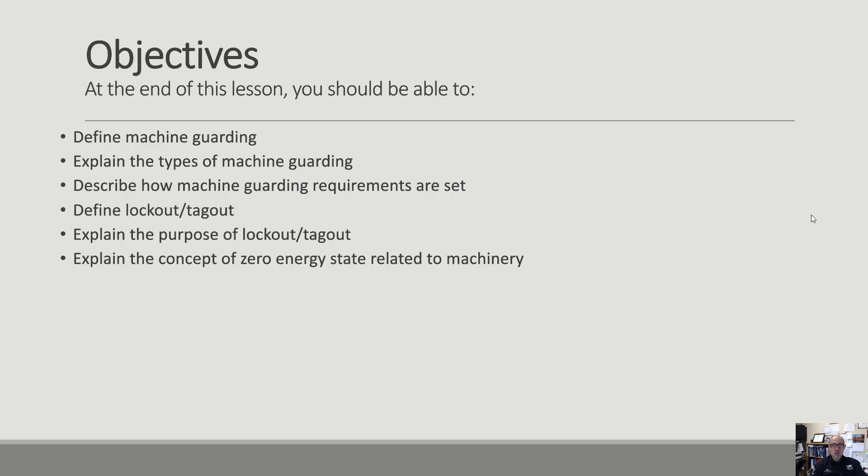Objectives: at the end of this lesson, you should be able to define what machine guarding is, explain the types of machine guarding that are out there, describe how machine guarding requirements are set, define lockout and tagout, explain the purpose of lockout and tagout, and explain the concept of zero energy state as related to the machine we were going to work around.

So, machine guarding. Many machines require special guards to keep the operator safe, and OSHA has many rules and regulations related to machine guarding. Pretty much anytime you've got moving parts, guards are probably going to be necessary. Some of the hazards that we try to mitigate with machine guarding are pinch points, crushing hazards, shearing hazards, rotational hazards, power transmission, so that can be drive shafts, drive belts, or chains, and then stored energy, compressed springs, or stored electricity, usually in the form of capacitors.

Generally, the distance the hazard is from the guard will determine the size of the opening. And this is set by the OSHA standard for machine guarding. It's part of the OSHA code. So the thought being, the farther away the danger is from the guard surface, the bigger the opening can be. Because if what's going to hurt you is a foot away from where the guard is, an opening just barely big enough to get your finger in, that's way excessive because you don't have a foot long finger, hopefully. So the farther something is away, the bigger the opening can be.

The closer that hazard is to you, the smaller the opening is, so you can't get much more than a finger into it. And here's OSHA's rule: if the guard is within 2 inches of a moving part, the guard opening must be a maximum of 3/8. So it's pretty small when you're working with stuff that's close to you. And there are tools available to check guard openings for different distances from the hazard. There's a picture of one on the next slide I'll show you.

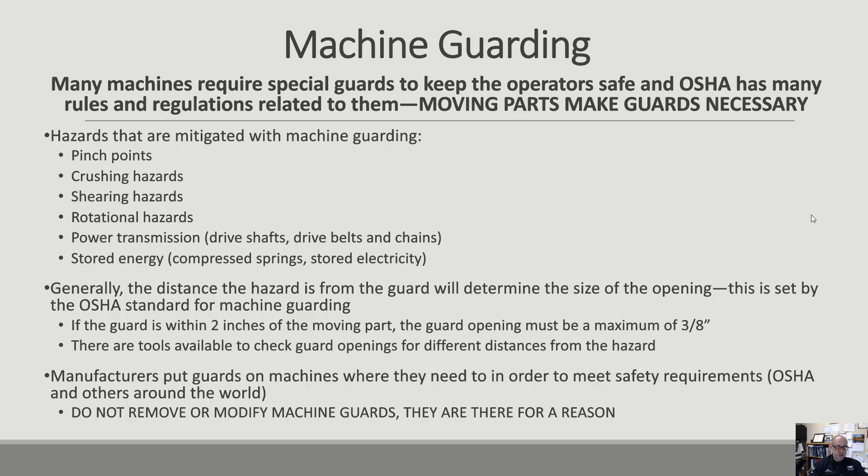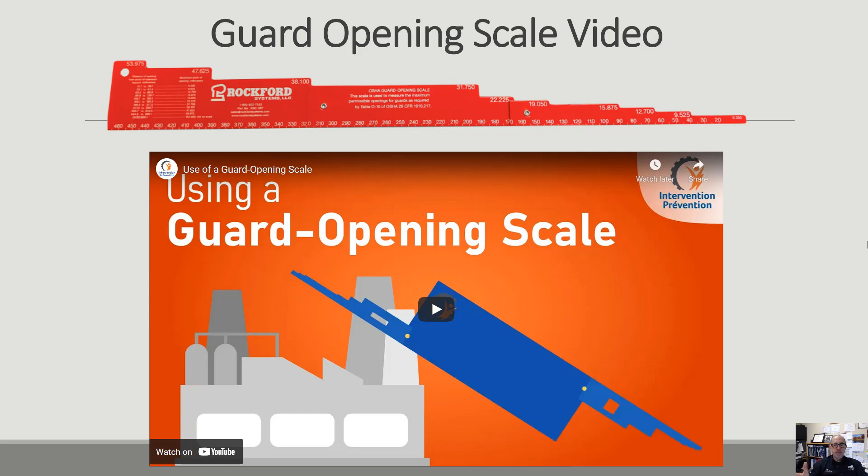And here's a guard opening scale. As you can see, the farther away you get from what the danger would be, the bigger the opening can be. And there's a short video you can watch.

So machine maintenance and service. One of the biggest hazards associated with machinery is maintenance, cleaning, and repair work. In most cases, guards have to be removed in order to access the machine or access lube points or adjustment points or to replace stuff that breaks. Many serious injuries and fatalities in the workplace happen during cleaning and maintenance operations.

Locally, there was a case where a woman was killed by being caught in a conveyor system. She was cleaning the machine while it was running. The guards were removed so they could clean it, and her hair got caught in the conveyor mechanism. It pulled her in the machine, and she was killed. And unfortunately, that's not a rare story. That is one of the most common causes of workplace fatalities when it comes to working with machinery: you get caught in it, and a lot of times those are going to be fatal injuries.

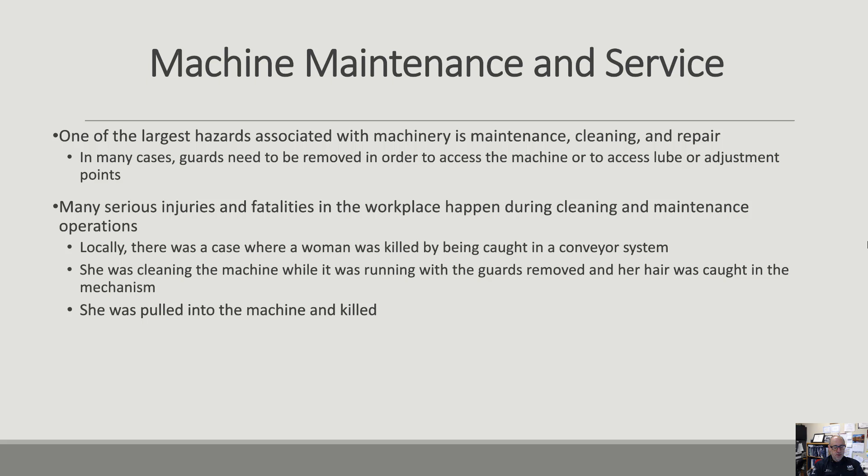There's another one, a pretty bad one. If you remind me, I'll tell you about it in class. It's pretty bad.

So, part two. In our own welding lab, we had an employee that lost a finger on our small plate shear. Our Chicago shear has actually taken a digit off of somebody, and it was during maintenance and repair work. The employee replaced the cutting blades on the shear and was setting the blade gap. You've got to set the space between the blades after you replace them, and you set that with feeler gauges.

To do this, the guards that keep your hands out of the shear have to be removed so you can get the feeler gauges in there to do your measurements. So how this works is, when the machine is idle, the blades are separate, so you can't see what the gap is between them. You have to manually run the machine down and then turn the machine off while the blades are overlapped so you can set the gap between them.

So the proper technique to do that is, everything should be locked out while you're working on the machine. When you're ready to cycle the machine, everybody working on it takes their locks off the lockout. You cycle the machine with everybody at a safe place and turn it off when you need to, and then you relock everything out, and then go get in there and do your adjustments.

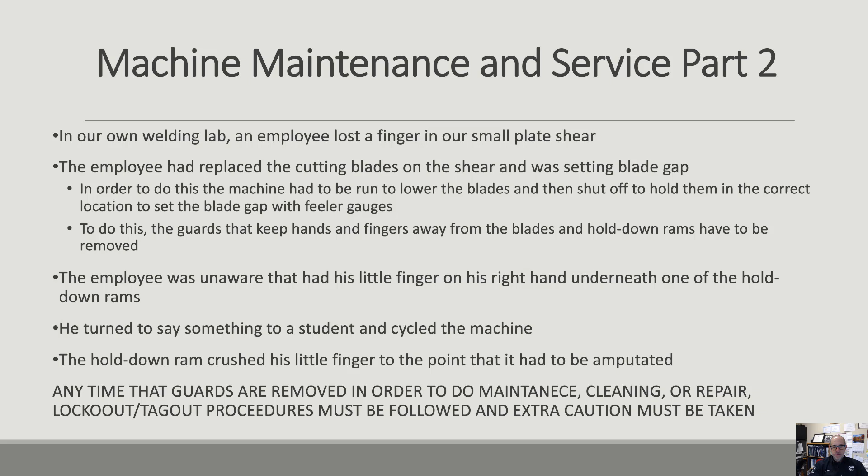So anytime guards are removed in order to do maintenance, cleaning, or repair, lockout tagout procedures must be followed and extra caution must be taken. It is truly what they call out-of-process work or out-of-sequence work, and that kind of work is inherently more dangerous because you don't have a set routine. You haven't done it 100 times before. It's something new. It's inherently more dangerous work.

Machine controls. Machine controls are another way that machines can be designed to be safer to operate. Many machine controls are designed to keep your hands out of danger while you operate the machine. Some machines require both hands to activate. This makes it hard to put your hands in the machine while it's running. A press, for example, might have two buttons on the controller that you have to push both for the machine to run. That's to make sure that you don't have one hand on the controller and one hand in the machine.

And some machines are made to be operated by two people. They have two sets of controls that are interlocked, meaning that it requires the operation of both controls to activate the machine. Again, this is to make sure that one person doesn't operate the machine while the other one is in the machine.

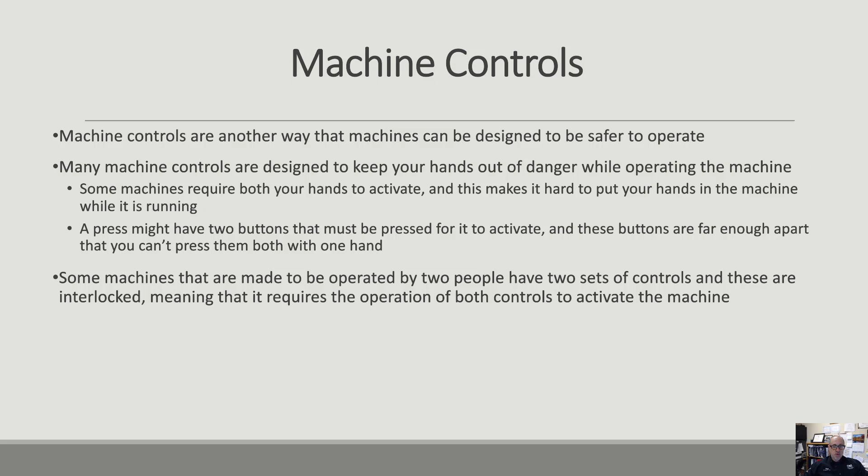So, lockout tagout. If you're in this industry for any length of time, you're going to get very familiar with lockout tagout. Understanding and adhering to its principles is absolutely critical to stay safe during machine and equipment maintenance and repair. So the two parts of that: lockout. Lockout, you bring the machine to a zero energy state, and we'll talk about zero energy state in just a minute. And you lock out the energy source on a piece of equipment so it can't be energized while it's being serviced.

How it works is people working on the equipment are issued individual locks and keys so that they lock out the piece of equipment. If there's 10 people working on a conveyor, which is what I used to do many years ago, there'd be 10 locks on the power box that operated that machine. And it couldn't be operated until everybody showed up and everybody took their locks off. Again, this is to make sure that nobody fires up the machinery while somebody is still working on it.

So tagout is used when you can't lock stuff out. A tag or a warning device is used to alert and warn others of a problem with machinery in unsafe condition. So tagout is inherently less safe than lockout since you have to be paying attention for them to work. You can ignore them or you can remove them, which is not ideal. Tags should identify a source of potential danger, and they indicate the equipment is being worked on and may not be operated until the tag is removed.

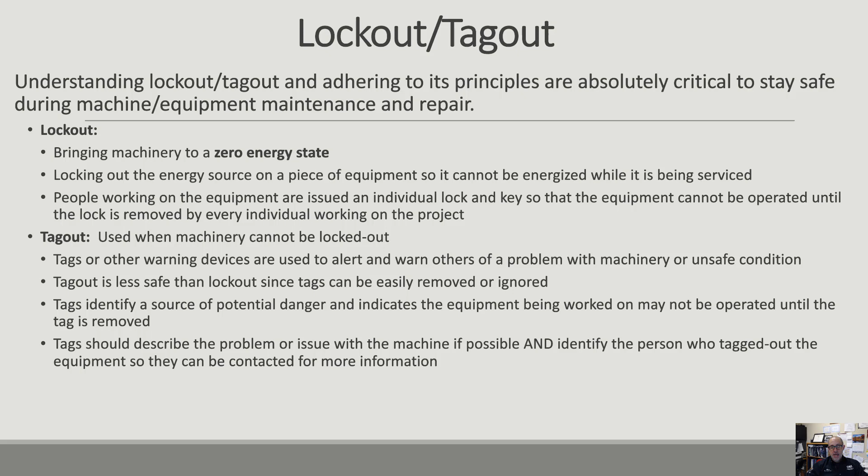It's not real helpful when you hang a red tag on something, either blank or with "doesn't work." That's not real helpful. The more information you can communicate, the easier it's going to be for the next person to figure out what's wrong with it.

So zero energy state. So what is zero energy state? It's broken up into two halves, electrical and mechanical. And what we want by zero energy state is to create a situation where there is no energy in the machine that can harm us or injure us while we're working on it. So on the mechanical side, it's going to be pressurized fluid. If there's pressurized air, that needs to be normalized. If there's external power sources, they need to be shut off and locked out.

Is that equipment supporting anything that, when we shut the equipment down, will move? And then mechanical potential energy, so compressed springs or suspended parts, and then kinetic energy, which would be machines that run drop hammers or forming dies.

And then on the electrical side, introduction of no energy. So we lock out the power supply coming into the machine. Equipment or structure contains no source of energy that could harm us or harm the machinery while working on it. On a lot of the new electrical stuff, a little bit of static can do a lot of damage to the controllers in them.

And then the big one for us is going to be no storage of energy. Every time you open up a welder, there are giant capacitors inside, and those capacitors hold a lot of current. That's why we as welders should not be working on the insides of welders. That should be left to electricians who know how to discharge those capacitors safely, because they can light you up pretty good.